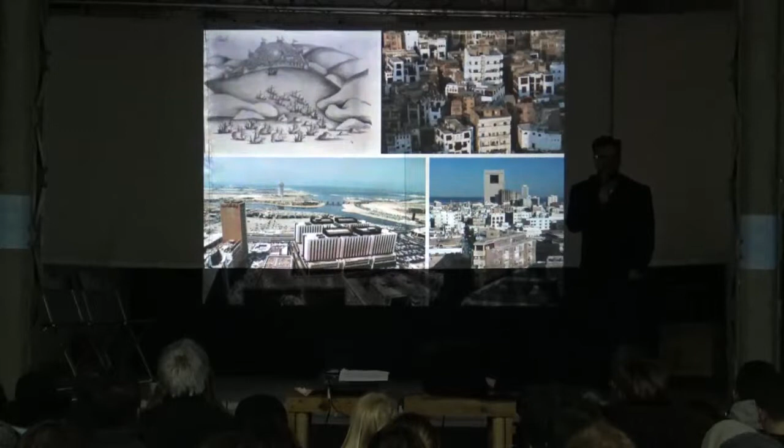The project is situated in Jeddah, and Jeddah is the historical harbor from where the yearly Hajj to Mecca started, so it has some meaning in the history of Saudi Arabia.

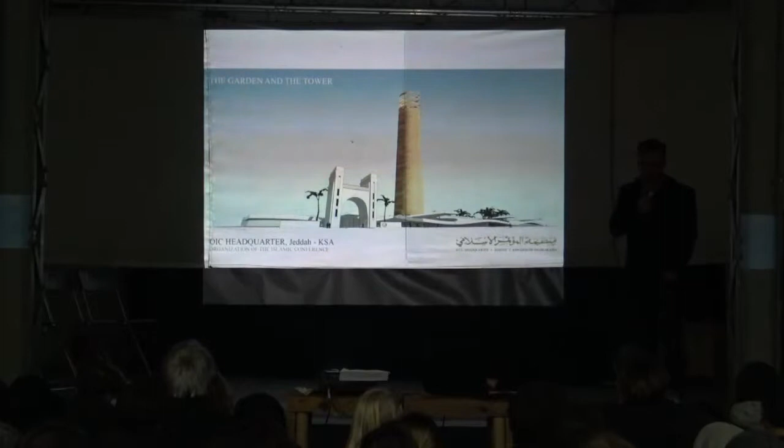If I go back to this first idea to explain the project with 3 sentences, it would be like the first sentence to make like a symbol out of the building. And because it will be in the background with some news or something, so it should have some symbolic character. The second one is use symbols from the Arabic world, so you see it almost looks like a minaret. And the third sentence for it was do a landscape project out of it. This you will see on the later pictures, if you go further on.

So the project is pretty simple. It's a tower built on a landscape. That also has to do something with the program.

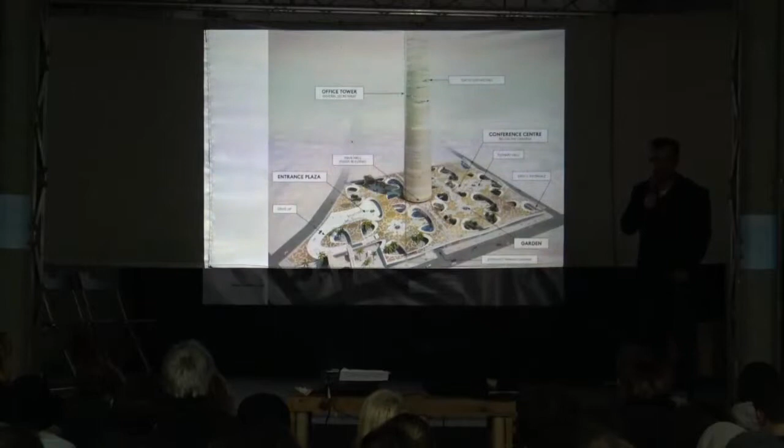First of all, 90% of the program is offices, and they were put in the tower. And 10% is like auditoriums and big halls and conference centers. And they were done in this plate, and we did it like at this 3-dimensional landscape you can see on the ground.

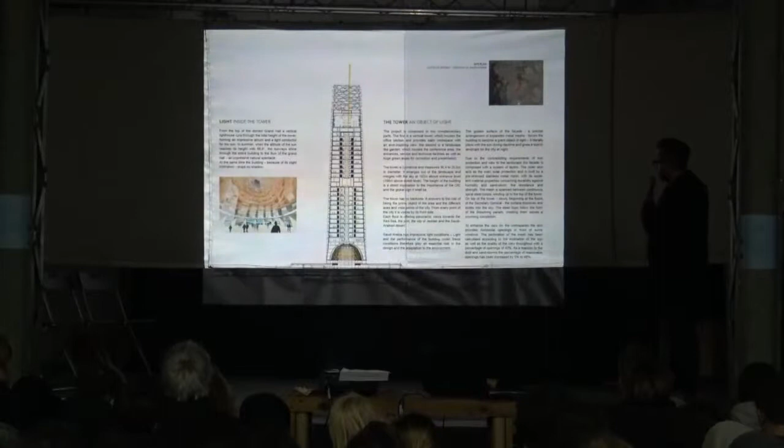That's a section through the tower. As you can see here, the design is based like on a big dome, which is like the entrance to the tower, and following this yellow stripe, there is a central hole which goes in the middle of the tower.

And for a few days in the year, when the sun is in the right position, you really have this sun exactly standing in front, above the tower, and you get the daylight through the whole building into the Great Hall.

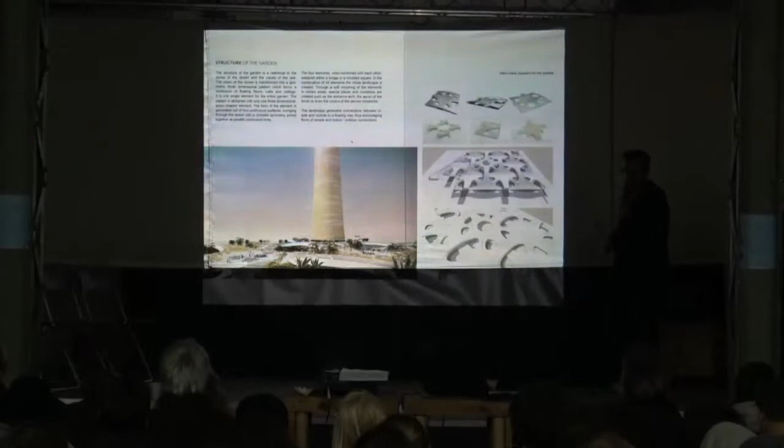These are just like the elements where this landscape is made of. It's like something like a woven 3-dimensional landscape. So you can see it's also important for us to make a building like this not too private. So this is like a public park where people can walk on the roof of the building, and it's pretty spectacular because we always can go like under some elements and over some structures. So it's something like bridges or like a woven, like a textile landscape that also provides a shadowing part.

That's like the main entrance. So you see the dominant tower also has this strong symbol.

Again, like a floor plan of this landscape, and you can see here, spread over the whole system are like these little islands which work like oases. So also some green is integrated in it.

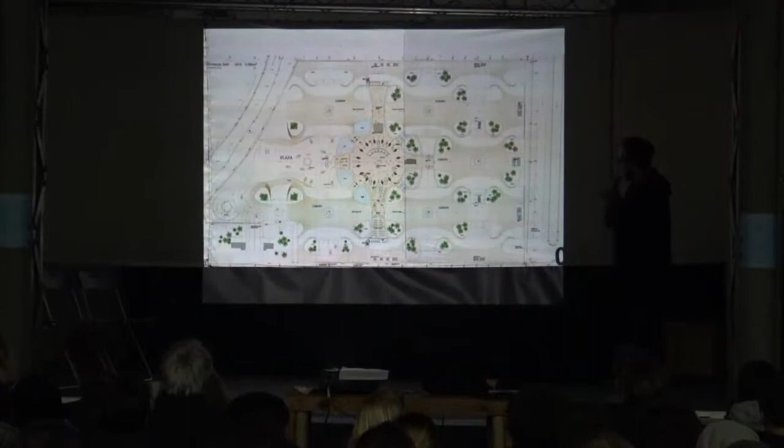This is the entrance hall itself. You can read here the word plaza, which is like, in a hotel, the entrance, and then you enter just directly under the tower where you find this dome.

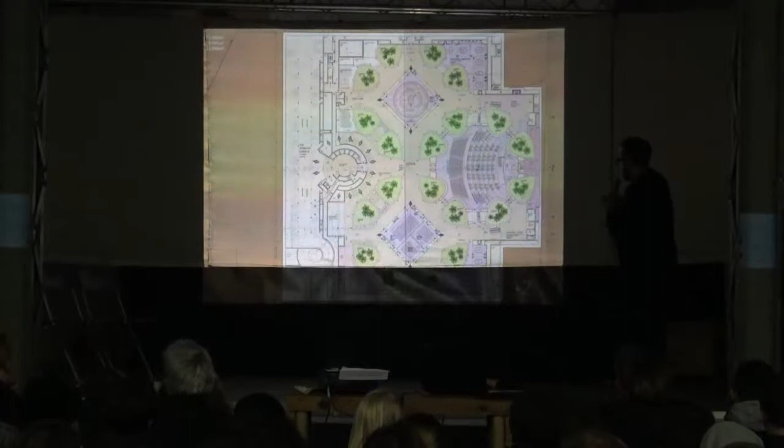Again, a floor plan of the conference center. You see like these lecture halls, and like here the big hall, foyer, and this diamond-shaped columns, they mark the position of the tower.

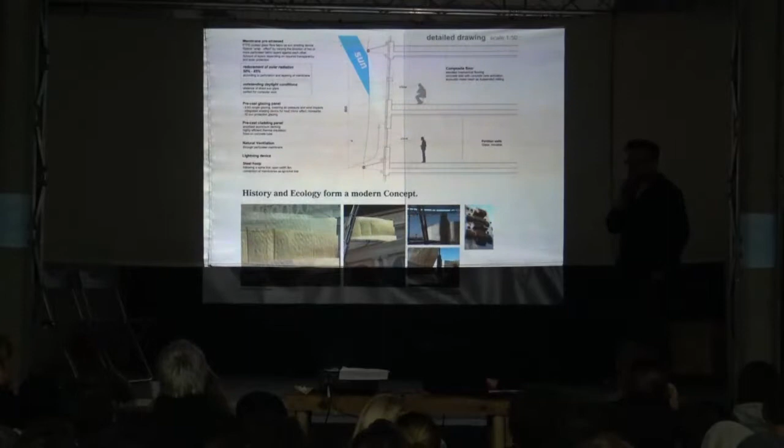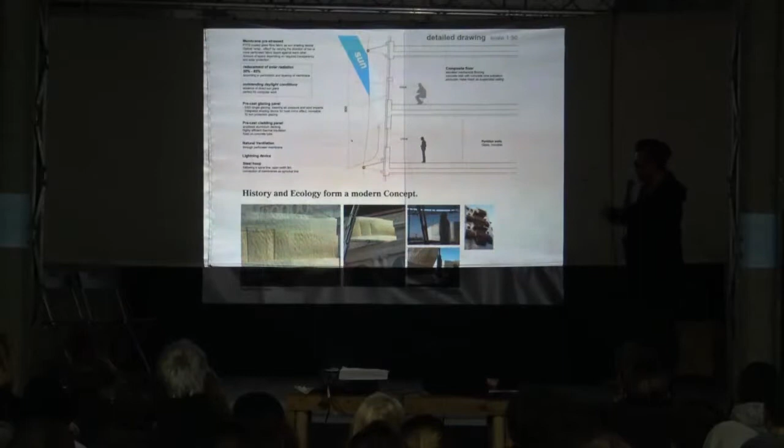In this case, we made a one-to-one model because the chief or president of the OEC was visiting incognito. If he had done that officially, the president would have to welcome him, but he just came as a normal tourist, and we prepared for him a one-to-one model of the facade so he could see how it looks in reality.

That's the structure behind the tower. On the left side, it's based on a concrete cylinder with windows, a bit like a traditional shape of an Arabic pattern. These are just some calculation or force line drawings from the structural engineers.

This is the difference: on the left picture, if the light is inside the tower, the windows let light through the facade. But you also have the possibility to put the light between the concrete wall and the outer facade, and then it just looks like a tower made of light.

This shows the change from day to night mode.

An important element of the design is the entrance hall, because it's the most prominent room, and there we took some patterns or symbols of Islamic architecture and tried to transform them into a contemporary solution.

So that's the drawing for it. We took the outlines that we know from some domes, cupolas, and mosques, and made something like an explosion drawing out of it.

There's just one point, not so visible here, but it's the main viewpoint, and if you stand at this specific point, you see the logic of the cupola. If you stand somewhere else, it looks like a chaotic structure.

So let's have a little break. I think it's the last one, the film, 24 pictures. Oh yes.

Here you can see you would enter the building through the main entrance. It's a bit slow at the beginning, but you see this three-dimensional landscape, which is the base with all the conference halls, and now you're heading toward the center, to the main entrance under the tower.

The columns bear the whole structure of the tower, and this is now the cupola with, at first glance, a bit of a chaotic structure, but you can already see that it looks in a way Arabic, like this Islamic pattern.

If you look up, you just see thousands of elements, and in the center this star-shaped hole, which is the central hole through the whole tower.

If you come closer to the center, you reach this one specific viewpoint, and then all this pattern comes to a certain logic, and from here it looks like a flat decoration. So the three-dimensionality of this sphere becomes like one pattern.

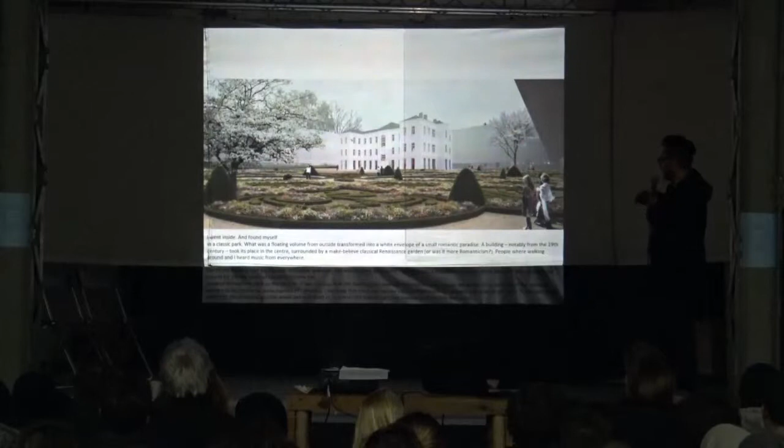Then the first thing you see is this historic building standing on the plot, which we had to restore, and there we will have an artist in residence — it's like a hotel for musicians.

Even if you enter through the wall, the first thing you notice is this historic building, but it's not the concert hall. So you enter the garden, and you have to find yourself and look around to figure out where the concert hall will be. Here's a model picture of it.

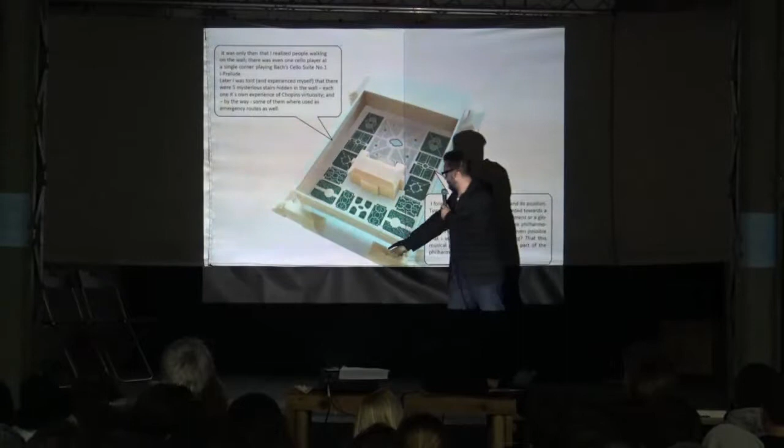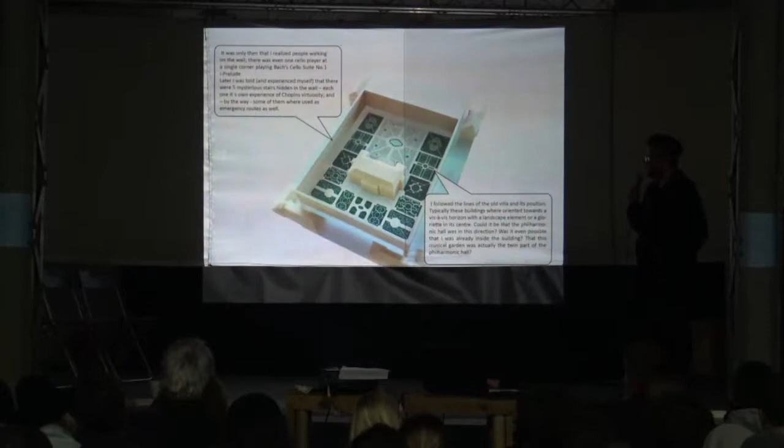You see this was the existing building, which is protected. It was a very noble villa in old Warsaw, with 4 supporting buildings always on the corners. We kept those buildings too, but left them outside of the wall, so that inside this special space, just the historic villa is standing.

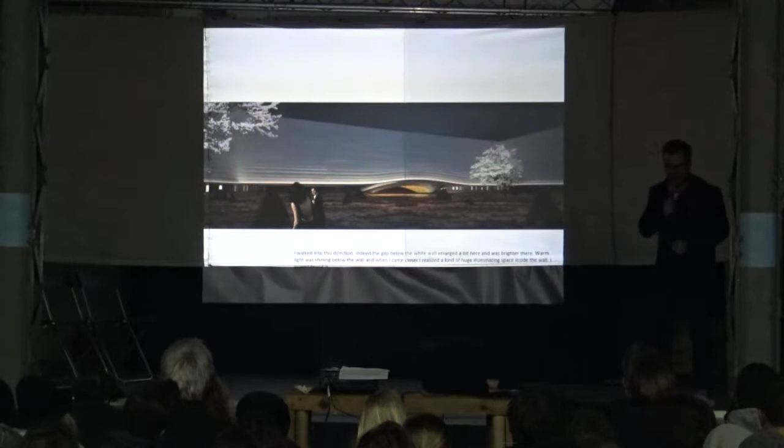Then as you look around — in the meanwhile it's already night — at one point the wall makes a curve and goes up, and some light shines through, so you recognize that must be the entrance. The next scene: you enter under the wall and you're in the foyer of the music hall. Finally you come to the concert hall itself, where you see these waving balconies down below.

Here again, the concert hall itself from the outside is pretty shy — you can't see it, it's just part of the wall. It looks like the thicker part of the wall that surrounds the garden and the historic building.

That's a plan of the garden and the main foyer. One principle was that this outdoor space — shown in this competition drawing as a historical garden, though this will change during the design process — should flow with similar elements into the foyer, so there's not a big difference in the layout or surface between outdoor and indoor space.

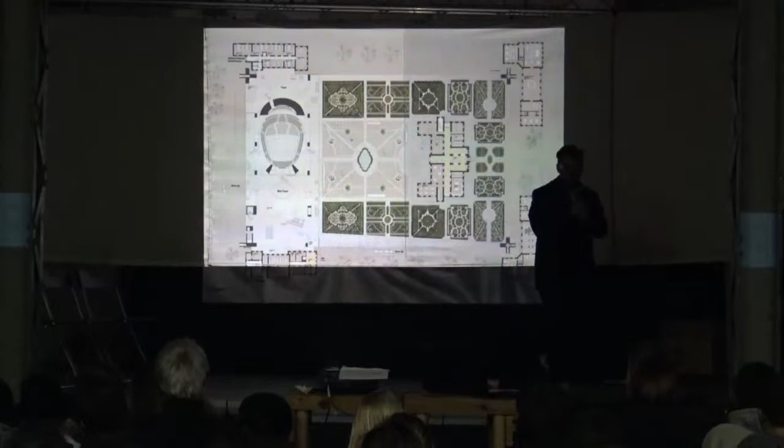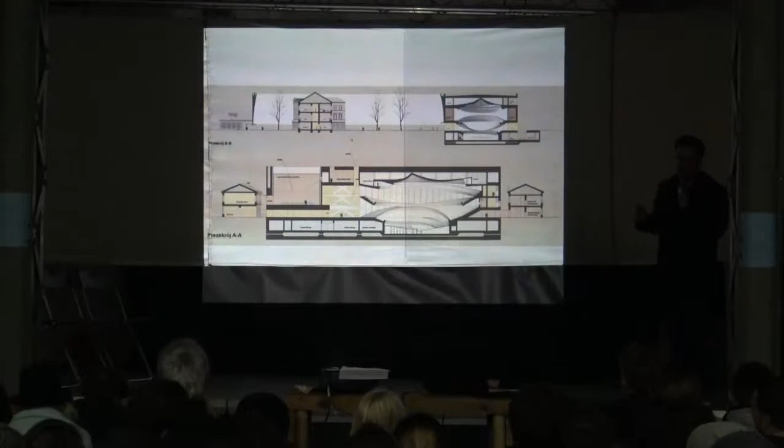Some sections — it's pretty complicated, because with a concert hall you have to ensure all the seats have a good view to the stage. You have to consider acoustic specialists who help calculate the materials and geometry of the space, so that there's no echo, or just the echo you want to have.

All the others, from the 5th row on, have a bad view. The other system is some kind of stadium, where everyone has a good view because you sit on balconies with the right angle to look down to the stage — but those concert halls usually don't have such good acoustics. We tried, together with our acoustic engineers, to overlap those 2 systems.

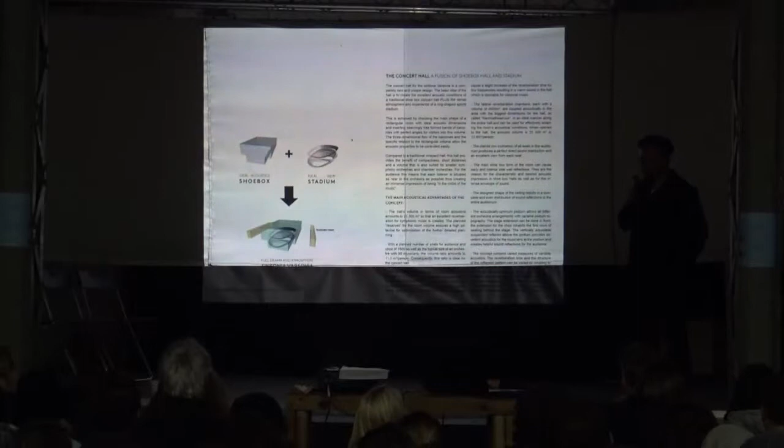So we built a shoebox with this rectangular outline of the hall, and we inserted those stadium-style balconies. In their models, this was done by the Müller office from Munich, specialists in acoustics for concert halls. They say it works pretty well. You just have to make sure the surfaces of the stadium elements don't reflect noise, and only the facades of the shoebox reflect. With this overlapping of two systems, you get pretty good acoustics and also a very nice view to the orchestra.

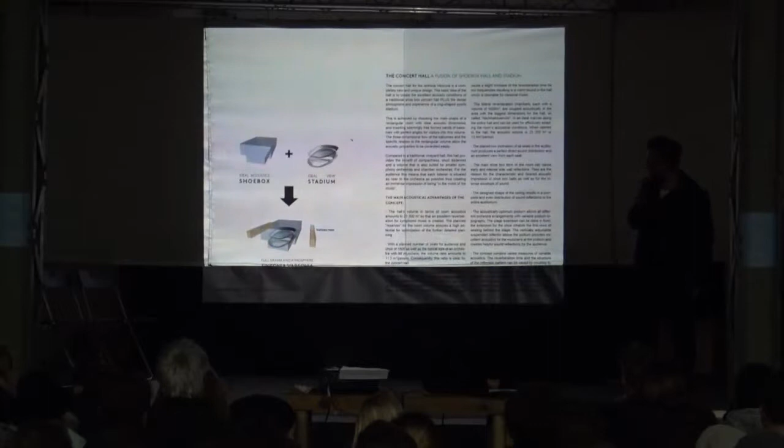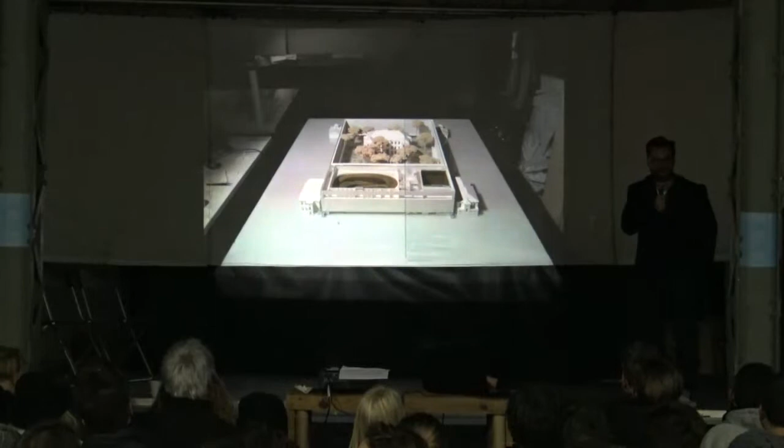Those are some model pictures for the second phase of the competition, and we were pretty proud because a lot of very prominent offices participated. For example, Zaha Hadid took 2nd prize, and we, as at that time a very unknown office, 5 years ago, finally won the 1st prize in this 2-stage competition.

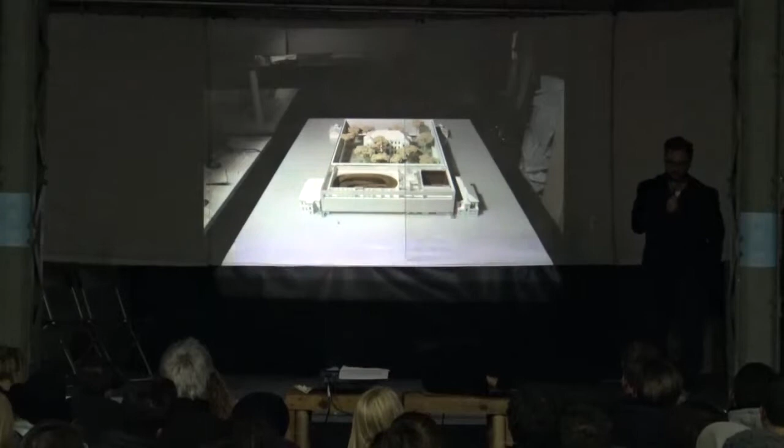And already in the 2nd stage we had to give them such a precise, big scale model. We did it so that you can put light on it, and then some light comes from underneath, like the concert hall was end-lit, but also in the model. You can go just through it. That also shows this floating wall, and that if you pass by, you get this glimpse or first look underneath it.

Another competition we won, a year later in 2011, was the Academy of Music in Tallinn, Estonia. This competition was about making a school for music, ballet and singing. It's a very nice concept because they wanted to have all the teaching rooms, all the big halls and concert halls included, and also a dormitory for the students. So it's really like this education hybrid building.

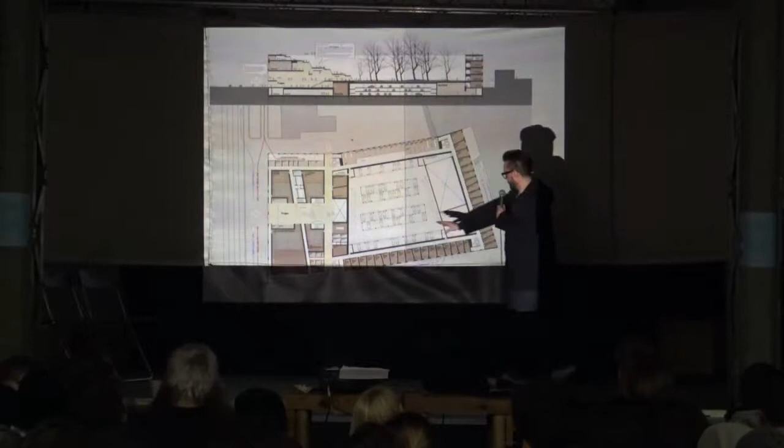Here you see the main idea is to make this big block that contains all the rooms for the school, and all the public rooms, like the concert rooms which also have public access, happen in the front part. So there they form also the foyer and the entrance, and everything was done, as you can see in the section, under a big staircase.

So we can go through those pictures now, because they just show the floor plans. And it was an important element that all these big halls we put under this staircase, and the staircase is something like a terraced extension of the indoor space. So it's very nice for the students or kids who get taught there or who live in the dormitory, that they have a lot of outdoor space, and they can even climb up a hill, because that's an element they don't have in their landscape, since everything is super flat.

And inside we made this forest that should also be done with trees found there in the landscape, so they survive the strong winters there, and that should make this very nice outdoor space, or this so-called garden of silence.

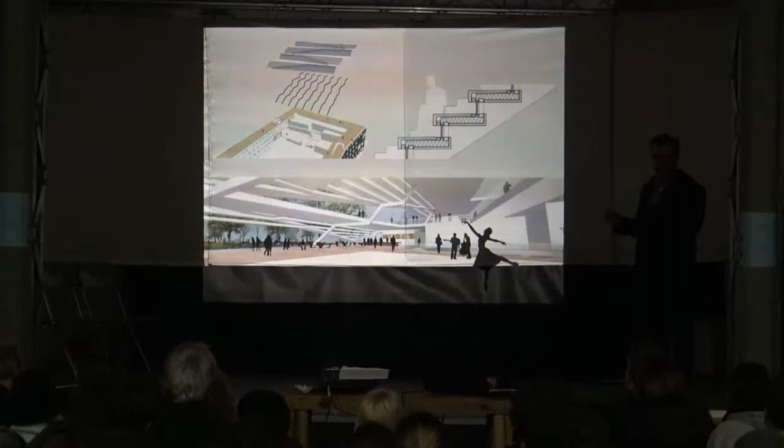Here you see this staircase should be done pretty transparent, so that you can even look through the steps. And these are just drawings from the competition, so we even thought about how to make the insulation of such a staircase, so that parts of it can still be made of glass and you can look through it.

Also again some model pictures of the competition. You can see this skin, like the frame wrapped around it inside this outdoor space. Just going through some more model pictures.

That leads us to another project, a local one now in Austria, a hospital in Salzburg. Hospital architecture is something pretty special because those buildings work like machines. They are very technical, highly equipped, and you don't have so many possibilities to make aesthetic or really good looking, nice architecture there.

So in our case, the first sentence for that design was: make a machine, a building that really works well. Because that's something basic, every hospital has to work well, it's a very expensive building and it just has to work.

The second thing was, we found a study of so-called green healing. That means scientists in the US found out that if you have direct view to green in a hospital, that reduces how long you stay in the hospital. So if you can look out of your window and see some tree or nature, you don't stay as long as someone who just sees other houses.

So the second thing for us was to maximize the green, or the park space, on the building and in the building.

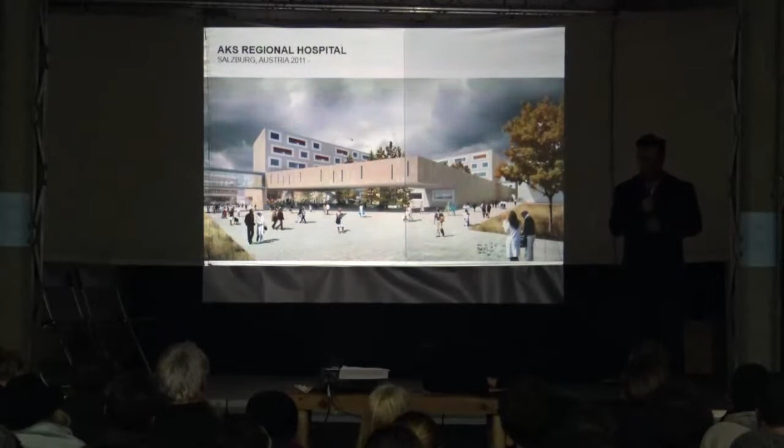And the third sentence was, if you analyze the program of a hospital, we have different functions, which you can reduce to two. One is where you get the treatments, where the doctors are working, and the second is where you stay as a patient, your patient rooms. The goal was to make the ideal floor plan for those functions.

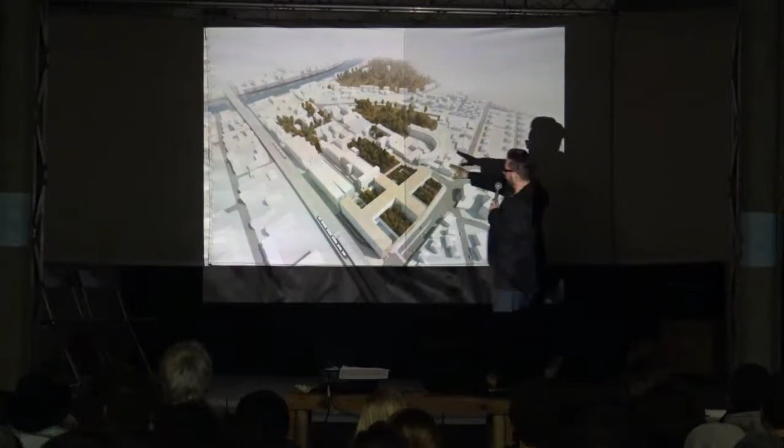So this was our solution. You see this big campus of the existing hospital, and here in this more yellowish color was our design. You see these four parks and this cross shape.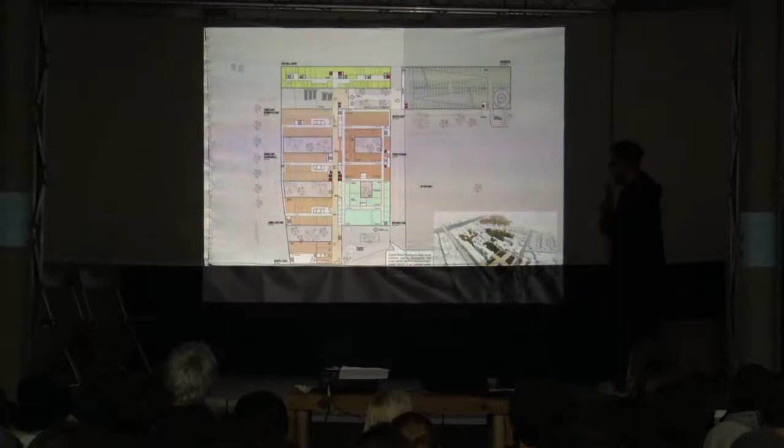This is the level of the functional part, where the doctors have their offices. This was based on a double finger system with a so-called magistrale in the middle, which is the main axis from where you enter the different sectors of the hospital.

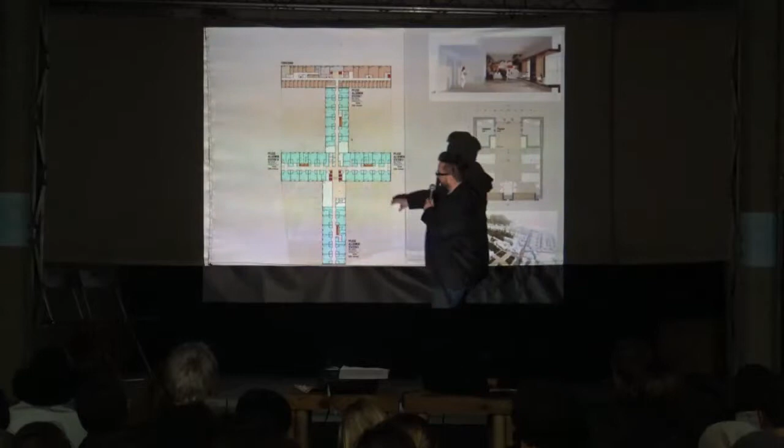And that's the floor plan of the sector where you have the rooms, and we did it as a cross. So you have one point in the middle where you arrive with your elevators, and from there you reach the different stations.

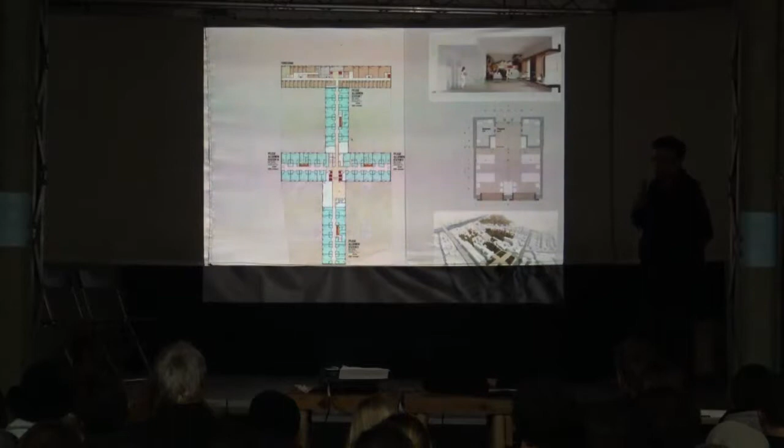With this we provided an ideal floor plan: the double finger system for the technical or medical part of the hospital, and the cross style is a pretty good solution for the stations, because you just need one point with the elevators and from there you reach four units.

This was the first phase. They started with just the park house, for about 1,200 cars, and we finished this a few months ago.

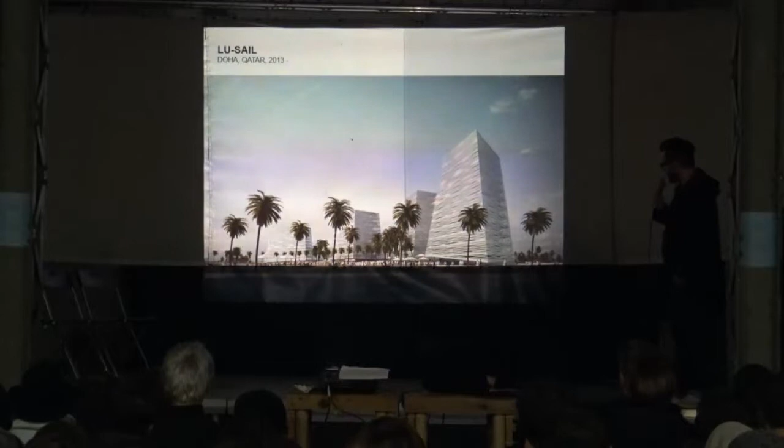Another project we did in the Arabic world was in Lusail, Qatar, a housing project. There you can see the site. It's one of these cities generated out of the desert. There was just a small town before, and now they have a lot of money again because of oil, and they're building settlements like crazy because they also got the soccer world championship.

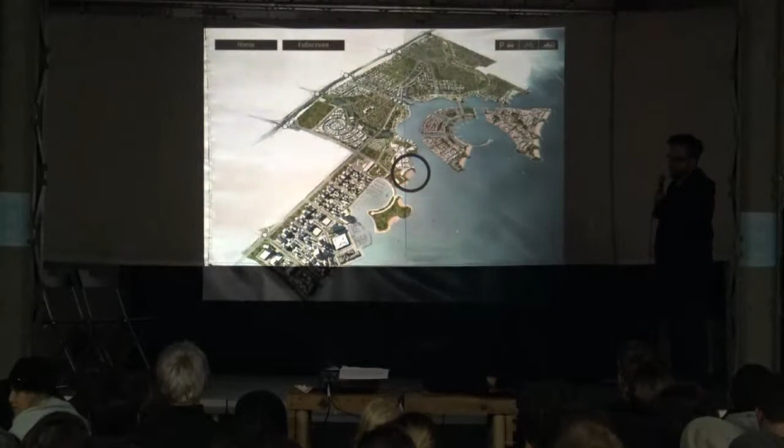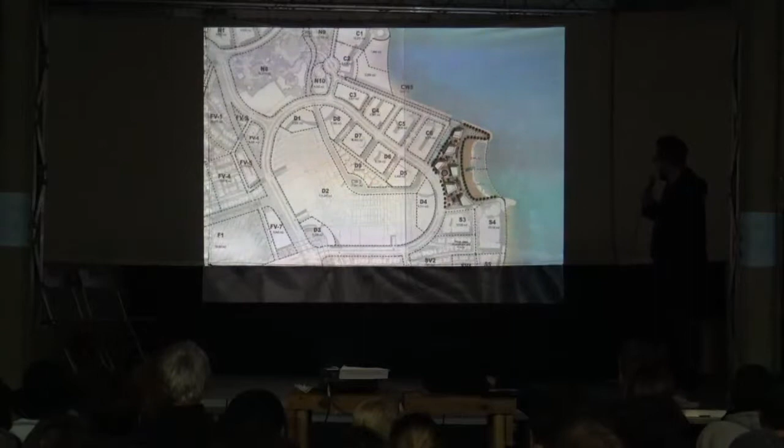So you see here all of these new settlements built in the last 10 years, and our site is the marked one. It's pretty high-class housing, so they have their own beach, as you can see here.

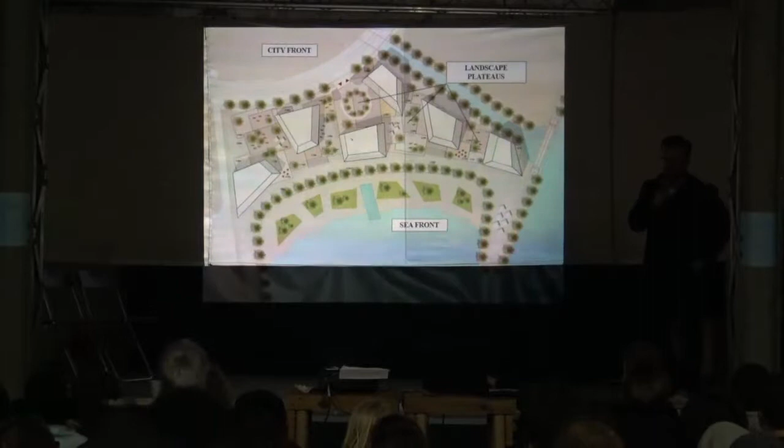Here you can see the city front and the seaside, and in between those buildings and the public space is this landscape of terraced plateaus connecting the different elements. All of them have views from the public places, like the squares, and also from the buildings themselves, so all sides of the houses have a view, also from the main entrance and this turnaround.

The buildings themselves are an interpretation of the classic Arabic courtyard house, because there the architecture is more about shadow and what light means, since they have so much light and it's so hot that they really like to have these semi-bright, shadowy courtyards.

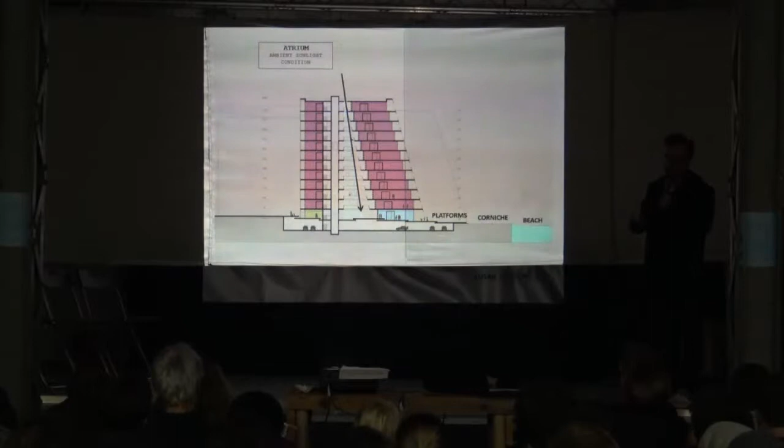There are different apartments and terraces everywhere, and of course public functions like bars and retail on the ground floor, which also support this landscape made of terraces.

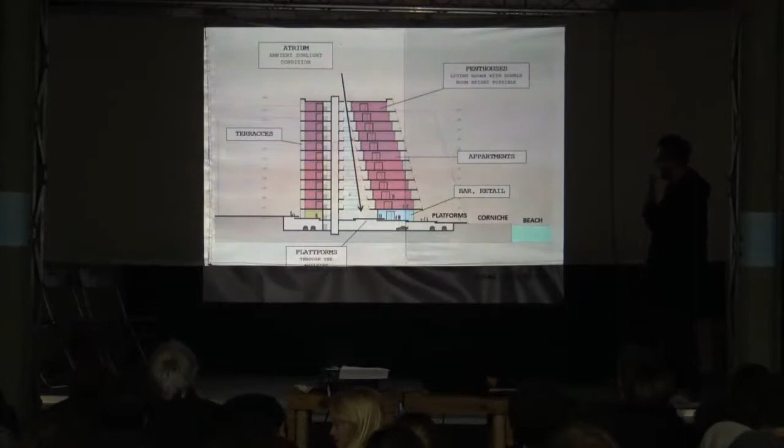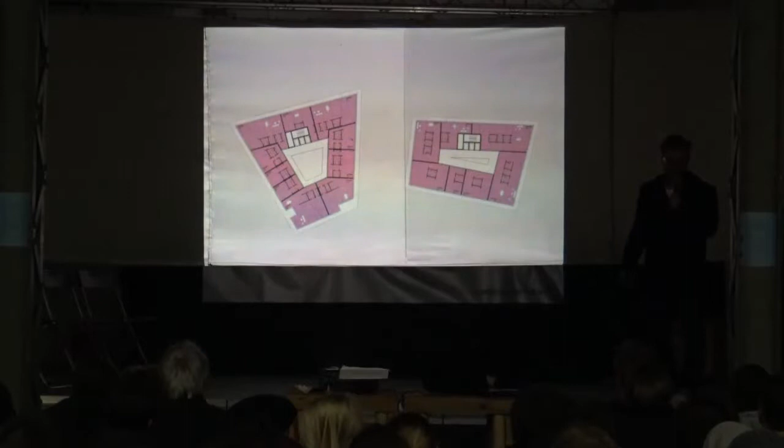Here you see some floor plans, which look pretty similar to the originally one-story traditional houses you find there. They step back as you could see in the model, and this stepping back as the building rises just comes from providing better views and not giving shadow to each other or blocking the view.

It was a big former brewery that's been out of use for almost 50 years, and the city grew around this area, so it's one of the, or maybe the biggest empty area in the city of Graz, and it's pretty close to the center, as we'll see in the next slide.

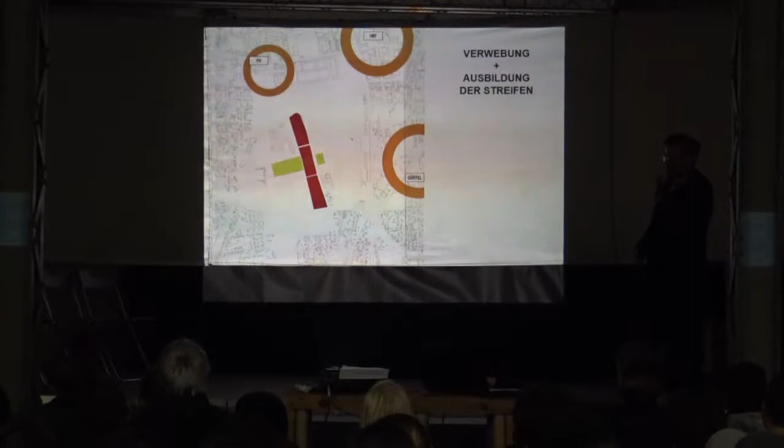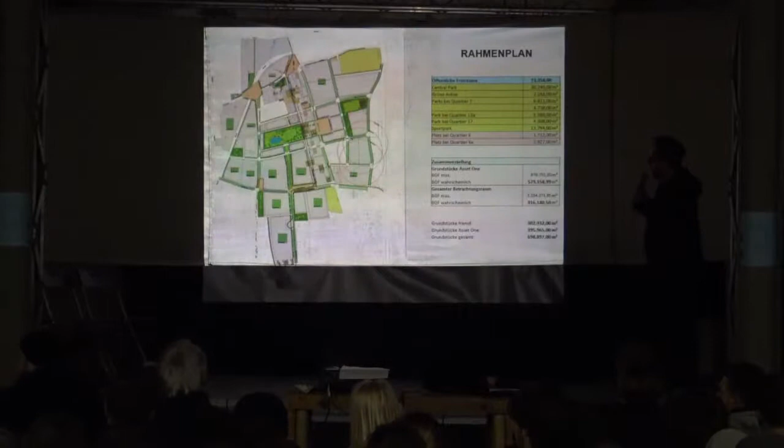Those two lines again show the main lines given to us as a base for the competition. The red one is the so-called esplanade. In the future they want to build a tram line here, so this will be the public transport backbone of the whole settlement. The green one is the new central park they want to establish in the center of the settlement. It's important to say that this whole area is designed to be totally free of cars.

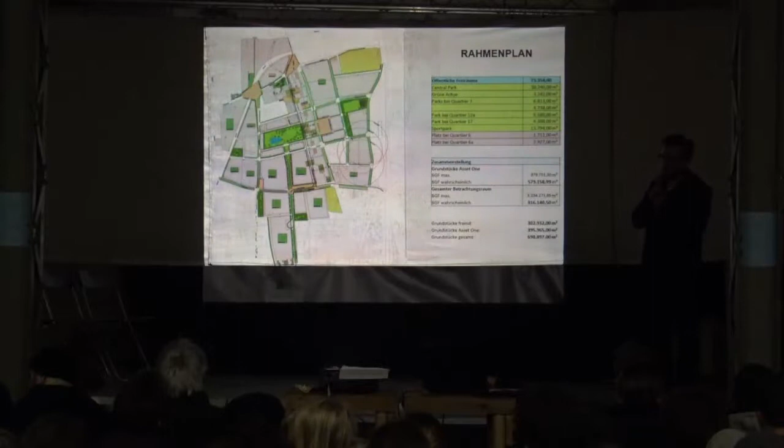Cars are not allowed to enter, so you have big garages underneath with entrances from the borders of the site, but all the streets are without cars. It's just for pedestrians, bikes and public transport.

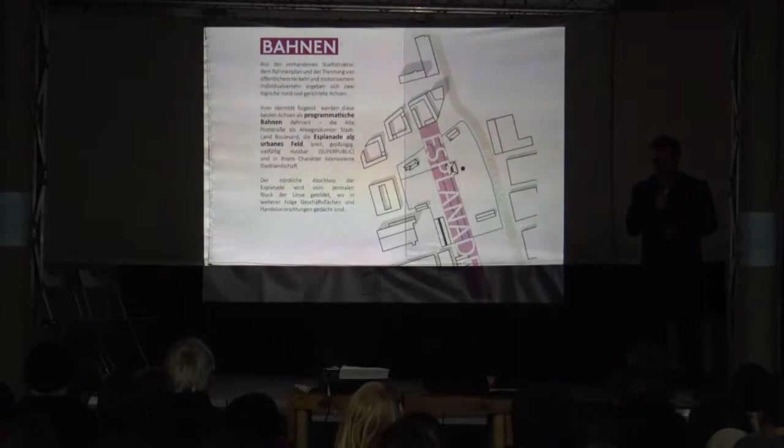This marks the first competition done on Reininghaus, since this area is extremely big. The task for us was how to create a vibrant and dense city, or part of a town, where nothing is. We just have a few existing buildings from a former brewery, but the rest is basically farmland, as you could see in the first pictures.

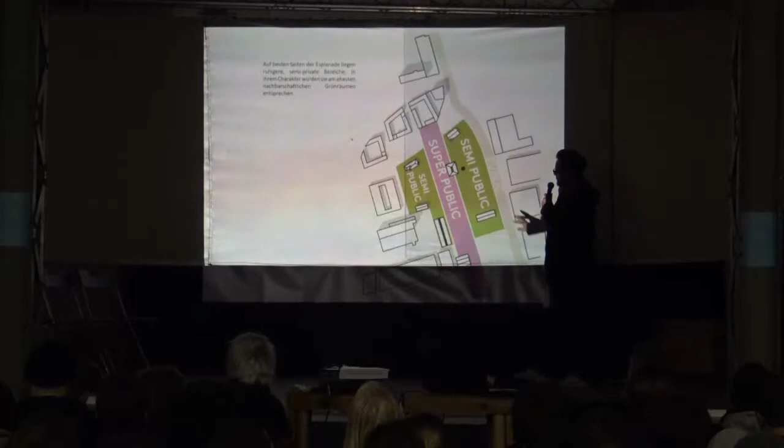We started with these stripes they gave us. First is the stripe we called super public, the so-called esplanade, that's where the triangle is. Then we have a public stripe, the main road already existing, which brings all individual traffic in. And in the north-south direction we created two semi-public stripes.

These were just some sketches exploring how we could find a design for this. We found this landscape architect from Brazil, Burle Marx, and we liked his work a lot, so we said, why don't we make public spaces using forms like he did, because we think he created very nice spaces.

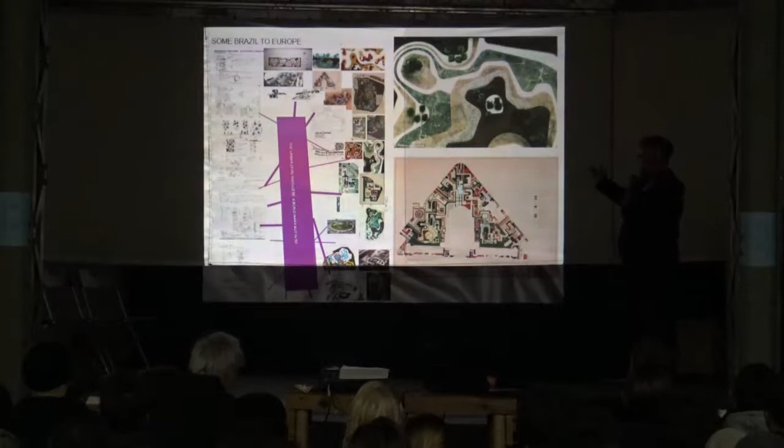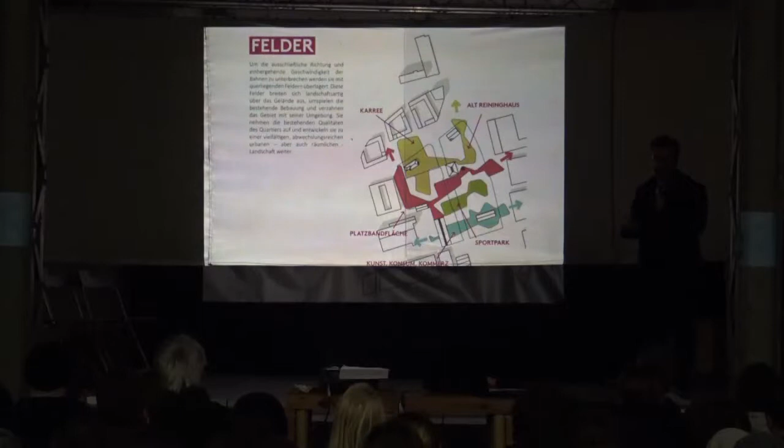So we made it a bit in his style, these so-called fields, which we called programmed fields, placed in the east-west direction. For example, this can be an Alt Reininghaus field, the next one is full of sport functions, another is full of consumer shops and similar functions, and another is just a park stripe, so green.

Then we considered who could be the user. We did this as if we had interviewed people who will move there, what their wishes and dreams are, how they would like to live, and we tried to put all these ideas into our final design. We also said we should provide a maximum variety of housing forms: block, terrace house, existing buildings, urban farming, row house, atrium house, tower.

That is also a result of the interviews we did for ourselves. If we want to attract everyone from society, to have a big range of people living there, we also have to offer a big range of possibilities for how they can live.

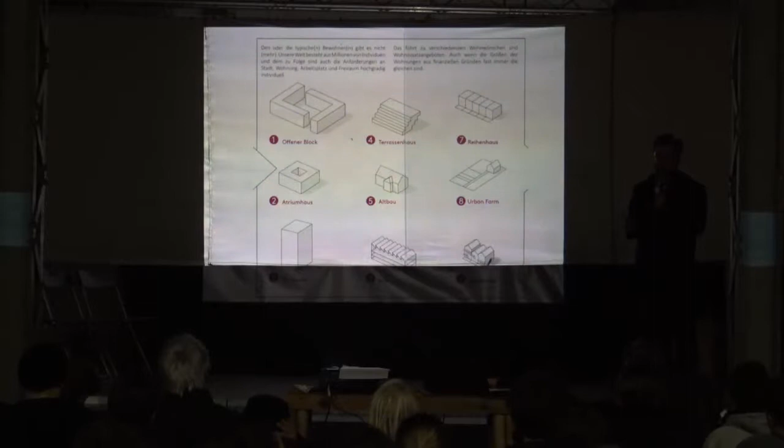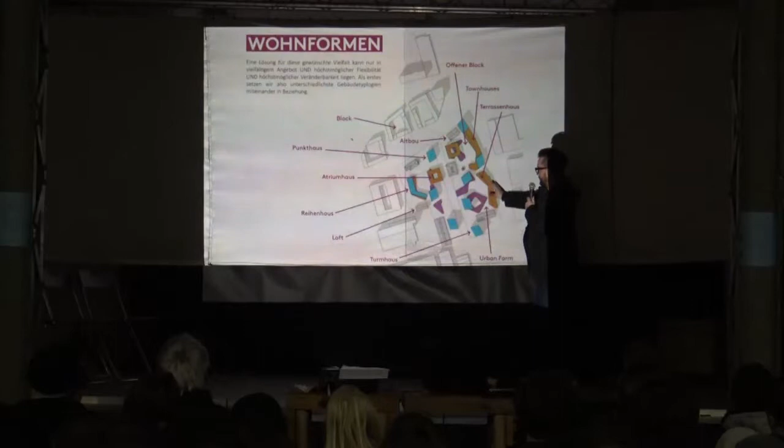So we placed these different forms. Sometimes we have court houses, stripes, snakes, towers, traditional houses, row houses. We placed all these different ways of building apartments, and everything follows the first fields and stripes, which was the base drawing for how you design the ground or open space.

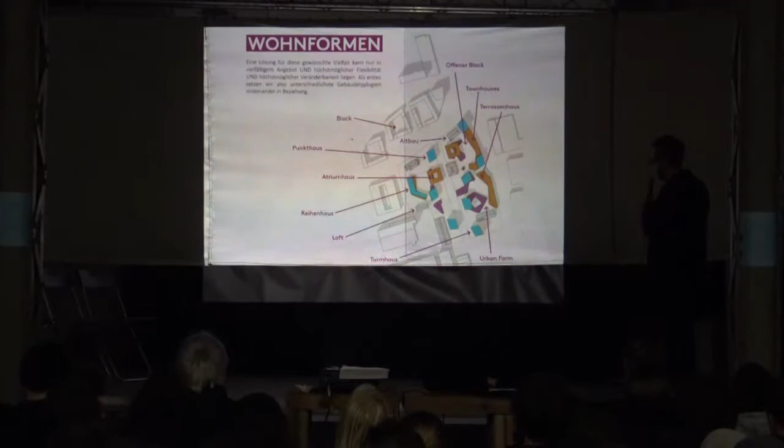That is the overlapping of those principles, and now you can see the logic: on the ground floor, those structures follow the lines and curves of the programming of the ground and surface, while the towers and higher buildings, marked blue here, are settled a bit independently from that.

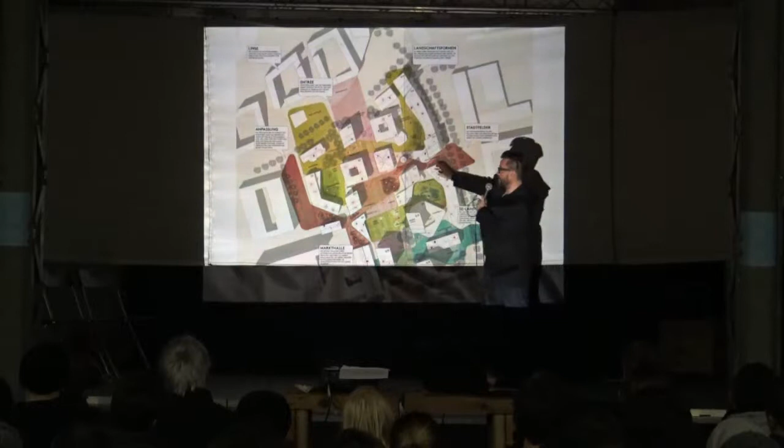For us, it was like, if you do a city that should work for the next century, take the best that you find in architectural history. So the ground floor, we took elements like you can find in historic cities. We have parts which are very narrow, then they open to a bigger space, then it becomes narrow again, and then again some open space. This is what you also know from the old town, that you also have narrow streets, bigger spaces. This is a very nice outline for public space, but it's not so good to make apartments there, because that results in a lot of shadowing places, a lot of places which are too narrow.

So the next step in architectural history was functionalism or modern times, where they were investigating what we have to do to make perfect apartments. It was more that they have light, sun, and fresh air. So they very often made this cluster type of housing, where all of the buildings have enough distance to each other.

And we thought about why not overlap those two principles. Why don't we create the ground floor zone or the first two floors in a historic old-style city outline, and the apartments themselves, which are the higher volumes, made as towers which have certain distance to each other to provide themselves enough light and fresh air. So we did this static system of superposition, where we just overlapped two principles of European urbanism. And that was the result.

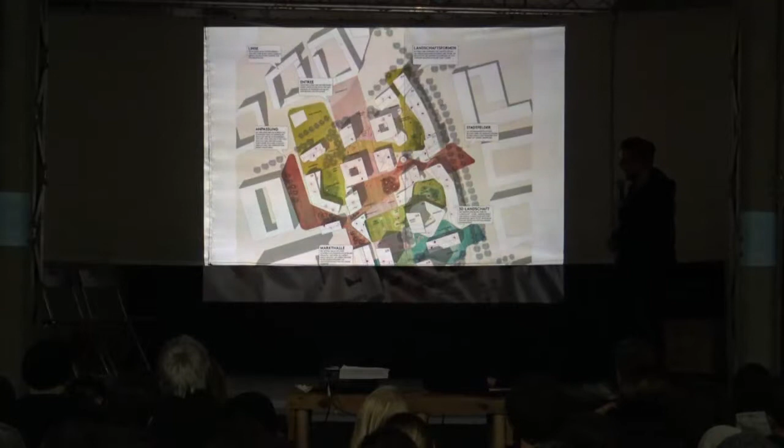So you can see the first layer, those colorful fields, is how you program the public space and the parks and the outdoor space. The next one, this orange one, is the ground level zone that creates this old European town system. And then the blue volumes, the higher ones that have enough distance to each other, so that all of them have light, sun, and fresh air.

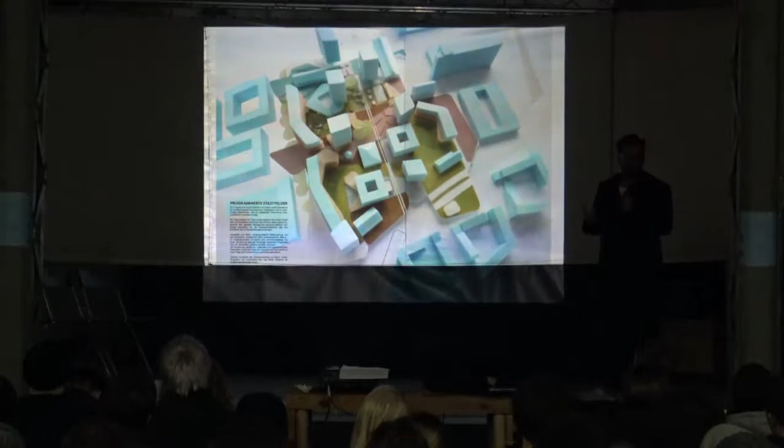Another thing which was very important for us is to design urbanism in section, which means in the program they asked for a division where you have 75% of apartments and 25% of other program, which should be something like shops, cultural stuff, restaurants, or offices, or everything which is not housing.

And to be flexible, it's more about the height of the room than how you do the floor plan of the house. Because if you imagine you make a building, in 10 years if something is changing and you want to redo the design of the house, it's pretty easy to move walls, but it's very difficult to move ceilings. And since nowadays everything has to be very efficient, you have this fixed room height for housing, for apartments, which is around 2.70 meters. But this is too low to make something else there.

If you want to have an office there, you have to have 3 meter room height. If you want to make restaurants or something there, or shops, you have to have at least 4.5 meter room height. So we thought it's not so good to provide one building which is just made out of office and another building which is just made out of apartments. Let's do this as a principle over the whole settlement and make the difference in the height of the levels.

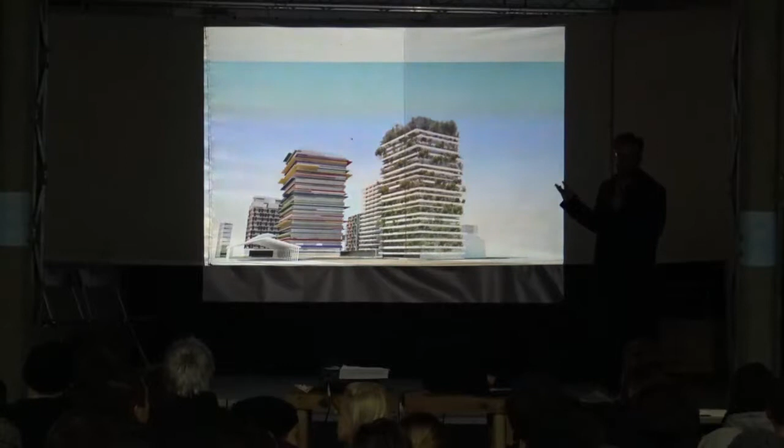Those are just some first tries of how the facade should look like. And of course, it's pretty massive what we are doing there because it's an extremely high density we have to build. And since we want to provide a maximum outdoor space or open space, we concentrate the density on a few towers. And all the towers should look different. So we make a green one, a colorful one, a woody one.

This is still something that we are working on, because also this project is realized in phases. And this green tower you see in the front will be the first building that will start on site next year.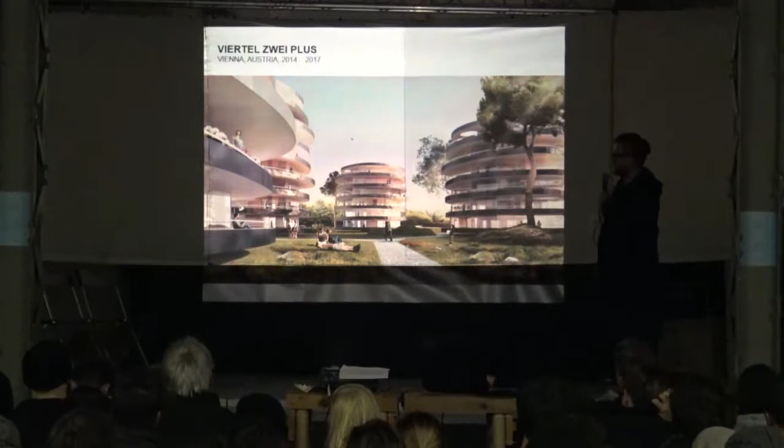Just some pictures of it. That's another interesting competition we won one year ago in Vienna. It's a so-called Cyclus, a housing project on a pretty cool site. This forest here is the Prater, this is the old hippodrome, the riding trail for horses, and this is the big football stadium. Here starts the new WU campus where prominent architects built a new university for business. For example, Zaha did the library there, and this was our plot.

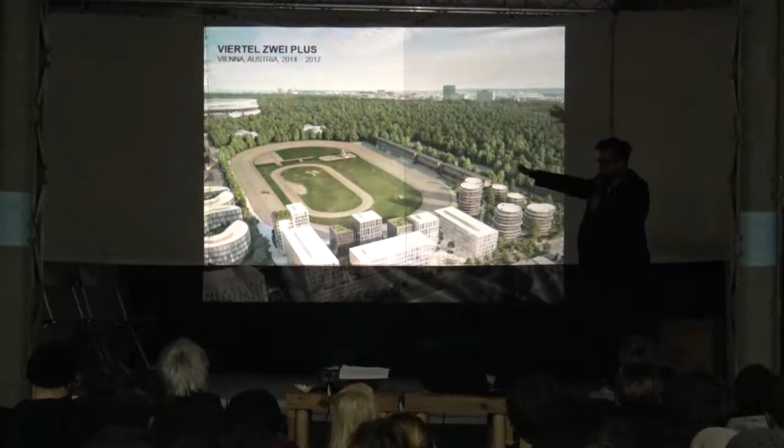The interesting thing here was that we don't often have a plot where you only have friendly or good neighbors. If you look at the surrounding area, we have the university campus, which is a cool neighborhood to have next to it. We have a protected forest, the Prater, which is like the best neighbor you can have because it's always green. Then we have the hippodrome, also nice because it's an open space. And here you have a pretty well done business area with offices, done very well.

So here it was all about taking a bit of a risk, because in this competition there was an existing master plan, drawn very strictly. They said we have to make a building like a wall that disconnects the apartments from the campus, from the university, because the students party and might be loud. The rest of the apartments should go on square tower buildings. They gave us the exact outline, and within it you were allowed to design something. We said no, that's not a good tactic, because if you have such a nice plot where you only have friendly neighbors, make it as open as possible.

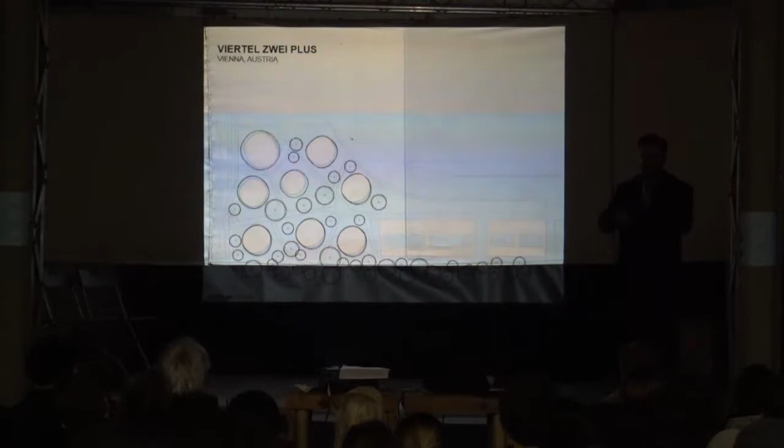So we went in a direction with round buildings, because every one of those housing towers should have maximum view in every direction. It was some kind of Belvedere project, and we explained it in a very simple way with a few sketches. This shows pretty well that from every building you should have a view to every neighbor or every surrounding field, because all of them are very interesting.

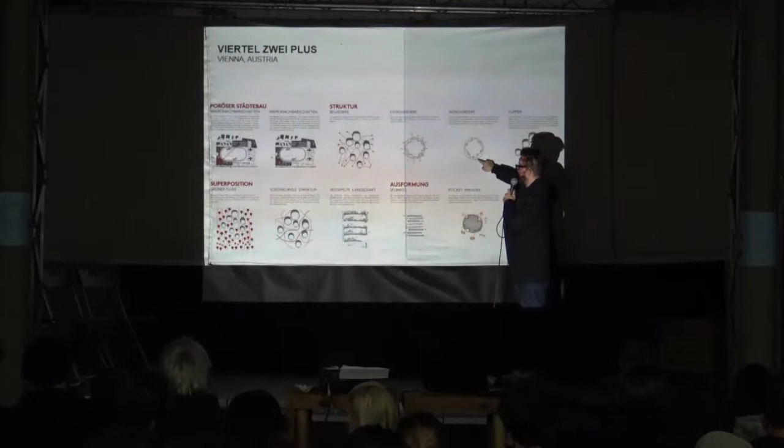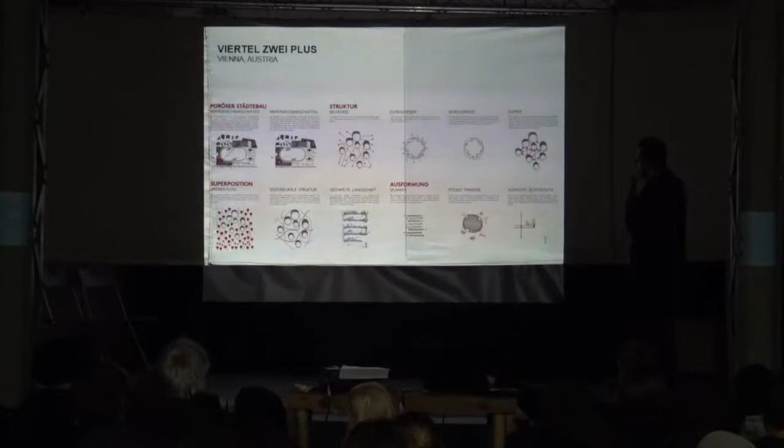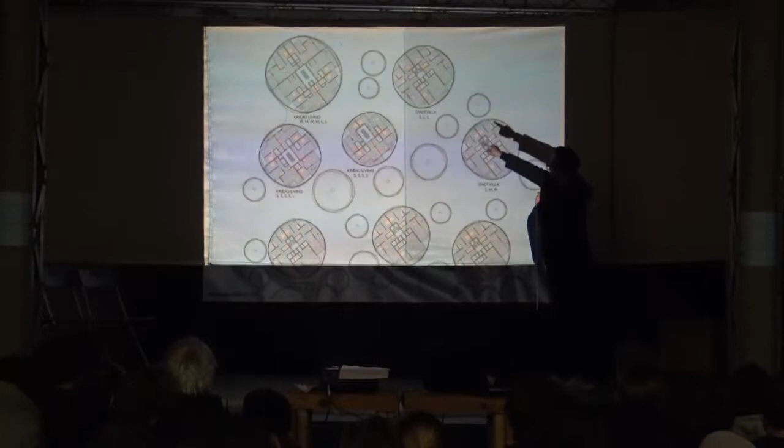Also for the apartments themselves, it's not so cool to have a fully round facade, so just the balcony is round, but the outline of the apartments has this rectangular step-back with corners. This way, every apartment has a few directions where you can make windows, so the apartments themselves in detail also have this multiple view. All of this is done in a very strict grid, because it's also set on the garage, so you have to find a logical system, but with very open style outlines. The outline of the balconies is these free, not very precise circles, while the outline of the apartments themselves is very rectangular.

Toronto is a very interesting city because it's extremely booming. A lot of people from all over the world move there, and it's like a crazy market there. You can sell every apartment that you build new, and a lot of companies move to Canada because they have a bit easier or cheaper tax system than in the US.

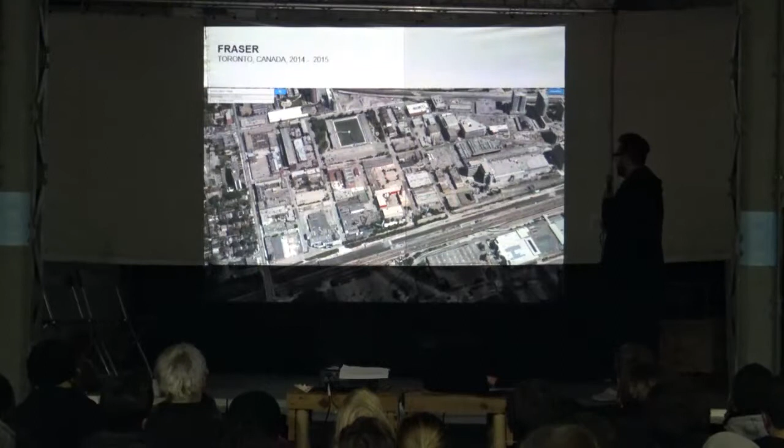They do all the digital stuff and special effects for the movies. It's interesting because even for them it's cheaper to be in Canada than in Hollywood, like Los Angeles. Toronto is already established as a new movie capital, so a lot of series, you might know How I Met Your Mother, are filmed in Toronto, because the center of Toronto looks kind of like New York. You have the same high-rise buildings, the same kind of police cars and everything.

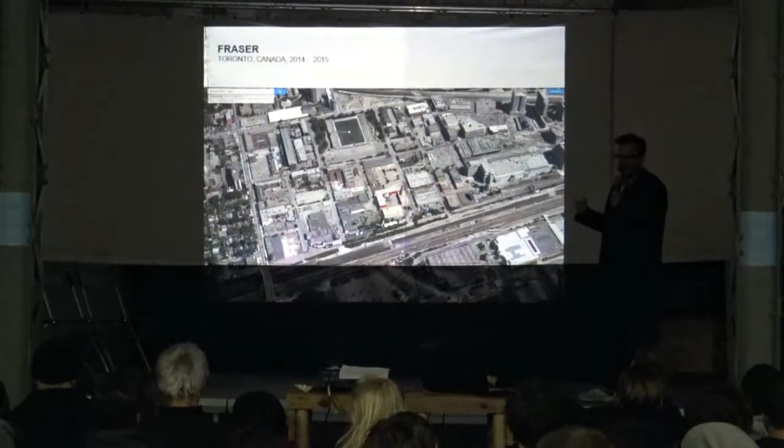And even this quarter here, this post-industrial area where we have this project, it's also started to get established as an office center for this movie production. They even have a building there where they film all the police movies, so you have a lot of fake policemen there. If you visit this quarter, you should not be surprised that so many policemen are there - they are just actors, because they do a lot of these series about police with indoor shoots of a police station.

And here's the building itself. And that's also interesting, because usually what you learn in school about offices is all about bringing daylight into the space. So your teachers will tell you, a wing with offices should not be deeper than 16 meters, because then you can provide natural light on every working space.

They wanted something totally different, because all of them are working with computers and they don't want any sun reflection on the screen, so they wanted dark spaces. They wanted open office levels, 5,000 square meters as one room, and they only need windows on the outline, because anyway they work in working circles - 24 hours of working, 3 times 8 hours where people are working. And when they do the programming, the rendering, the post-production, they don't even want sunlight. So they have all these working spaces in the center where it's really dark, and just meeting rooms, kitchens, and those things on the outer facade.

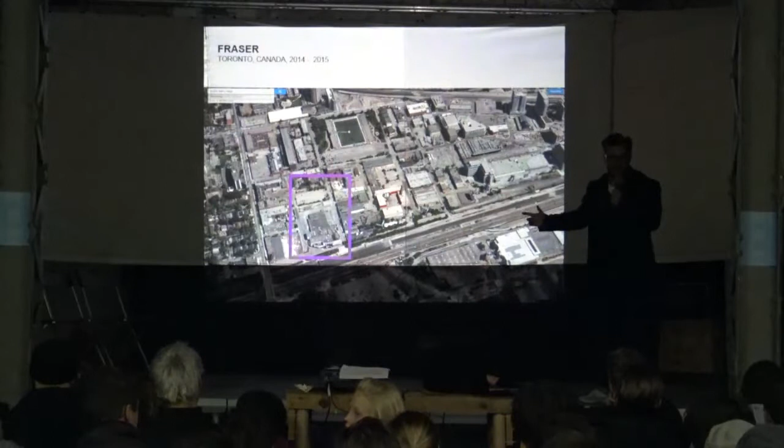Which was very easy for us, because they would just have to restore those levels and those big production halls, and we didn't have to care about daylight. But that was interesting for us, because we thought it would be difficult - we'd have to cut light yards to bring daylight into these deep floor plans. But they wished the opposite, they just wanted these dark places.

So here you can see this existing shell, and of course they liked this industrial design of it. So we didn't even have to do a lot of things, just remove asbestos and dirt or poison materials, color it in a nice way, and put a nice floor inside.

And the interesting thing is they are very quick in Canada with everything - we even got the prize for the best restoration of the project in Toronto before we started the site. Just with the application plans we gave to the authorities, they said, oh, we don't destroy the old building, so we give you the prize for the best restoration. It was a big surprise for us also.

And there you can see, so we keep all these materials like the rusty steel and the brick walls. We just add some - of course we open the facade, so we bring these glass facades in, and then we have these endless floors in the future offices.

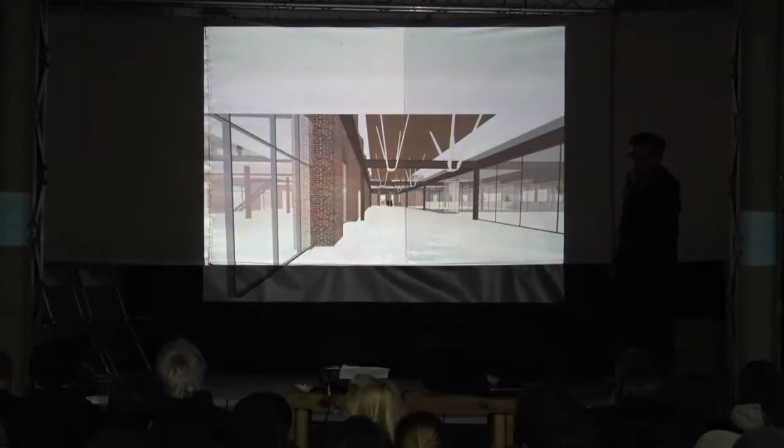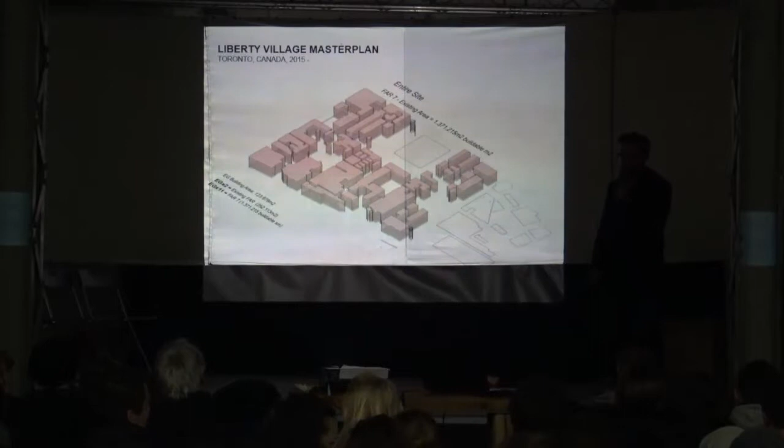And since the authorities there, the city of Toronto, were so happy with this design, they commissioned us to make a master plan of the whole area there, which is called Liberty Village, which is pretty cool because we have all these post-industrial buildings and everything, and they want to have now a master plan for how to also integrate housing.

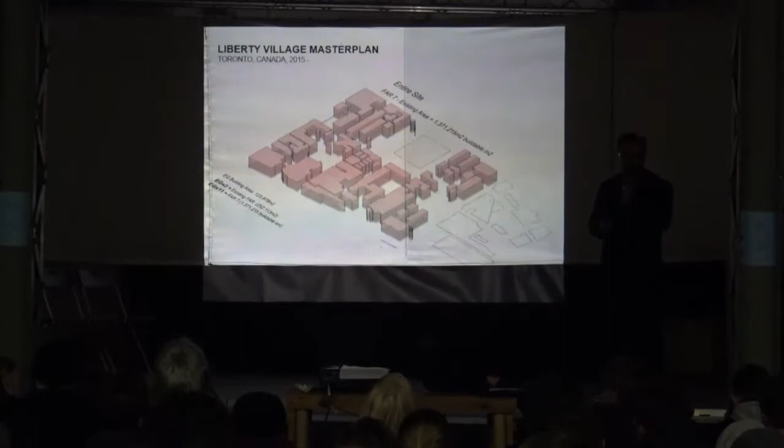So, but this leads us now not to a project in Canada - this is not like the last country we visited. These are our projects in China.